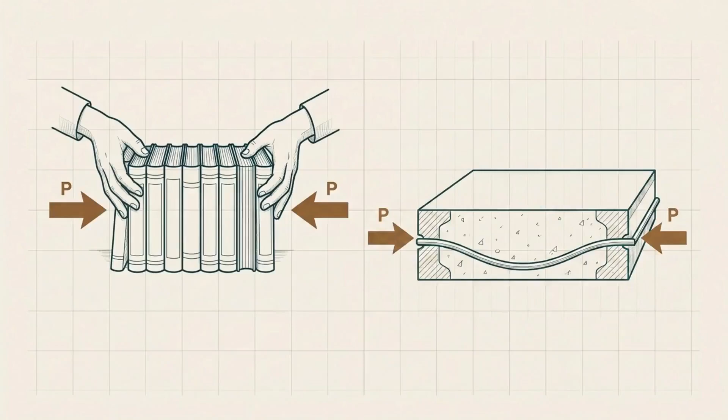Welcome back, everyone. In part 1, we saw how post-tensioning gives concrete muscles. Think of it like holding a stack of books horizontally. If you don't squeeze them hard enough from both ends, they'll fall. That squeeze is our active force, unlike regular reinforced concrete, which waits for a load to start working. Post-tension slabs are pre-compressed, ready to fight gravity from day one.

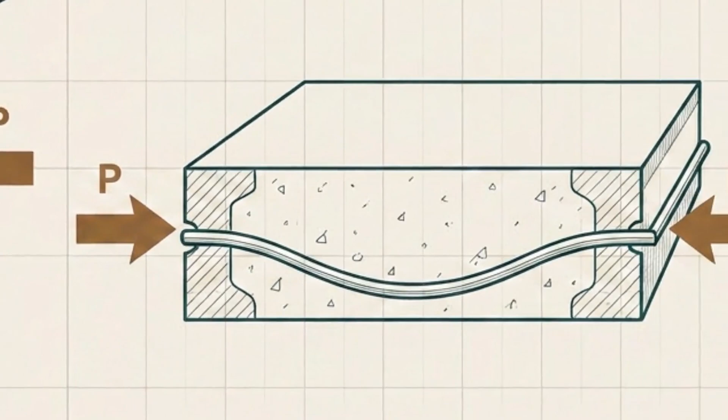Today, we'll look at the math that keeps these muscles strong and how the ACI 318 code ensures they don't overexert themselves. Let's talk about the magic formula.

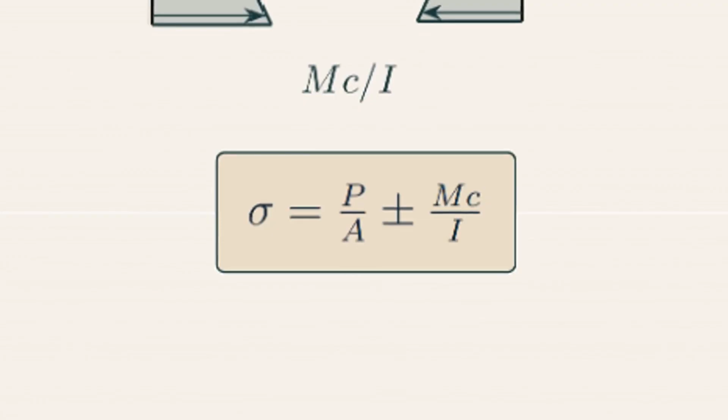To find the stress at any point, we use the combined stress equation: Stress equals P over A plus or minus M times C over I. The P over A part is the uniform squeeze we just talked about. The M times C over I comes from the bending moment.

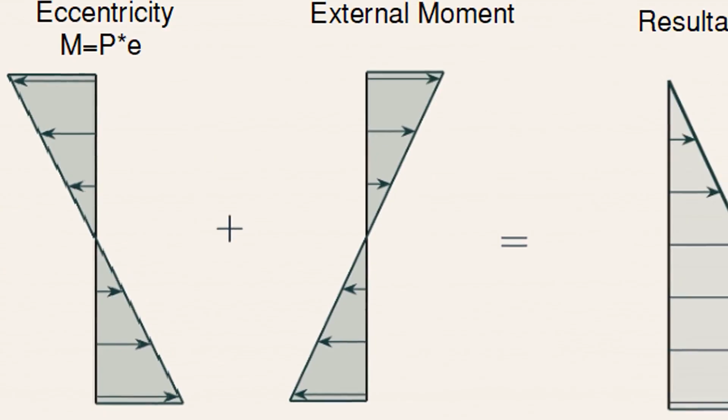But here's the trick. In PT slabs, we have an eccentric force because the tendon isn't in the middle. This creates an internal moment that actually counteracts the external loads. It's like leaning back while carrying a heavy box to stay balanced.

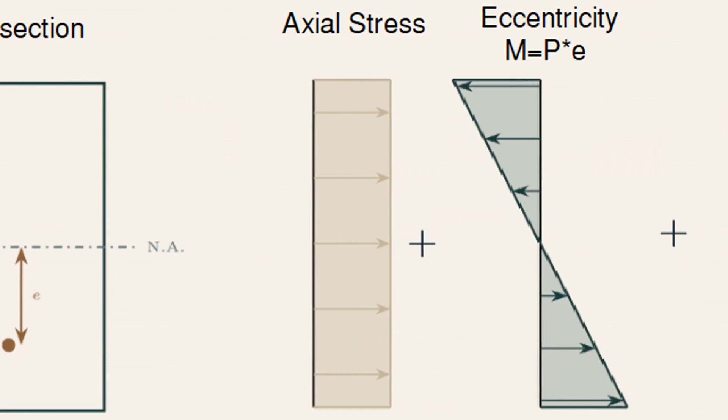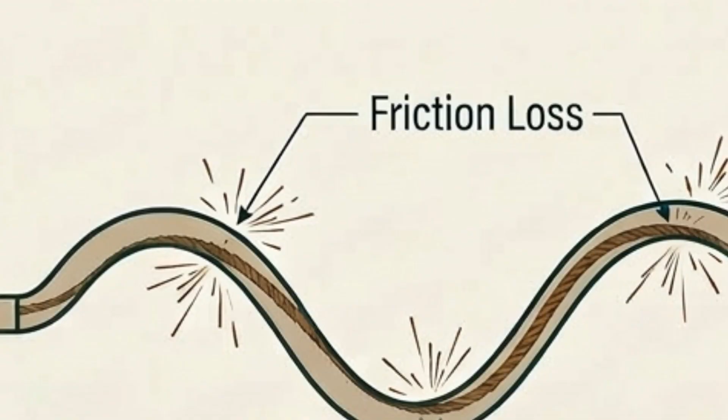Now we don't get all the force we pump in. Some is lost immediately. First, there's friction. Imagine pulling a rope through a curved garden hose. The more curves and the rougher the hose, the harder it is to pull. In PT, the steel rubs against the duct.

We also have elastic shortening. As we squeeze the concrete, it shrinks slightly like a spring, which causes the steel to slacken just a tiny bit. We must account for these thefts of force during the design stage.

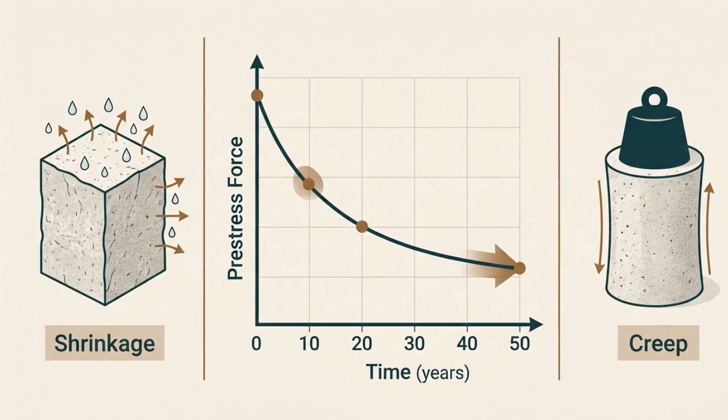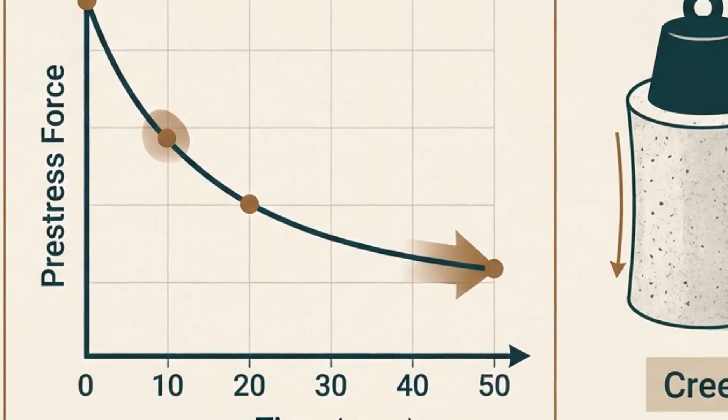Then there are the long-term slow losses. Concrete is alive in a way. It changes over time. Shrinkage happens as water evaporates and the slab physically gets smaller. Then there's creep. If you stand on a memory foam mattress, you sink slowly over time. Concrete does the same under constant pressure. Finally, steel relaxation happens when the high-strength wires get tired of being stretched and lose some tension.

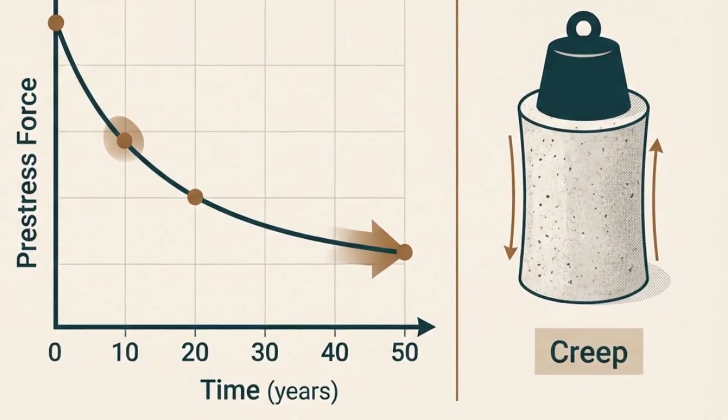Total losses can range from 15% to 25%, so we always over-tension at the start to compensate.

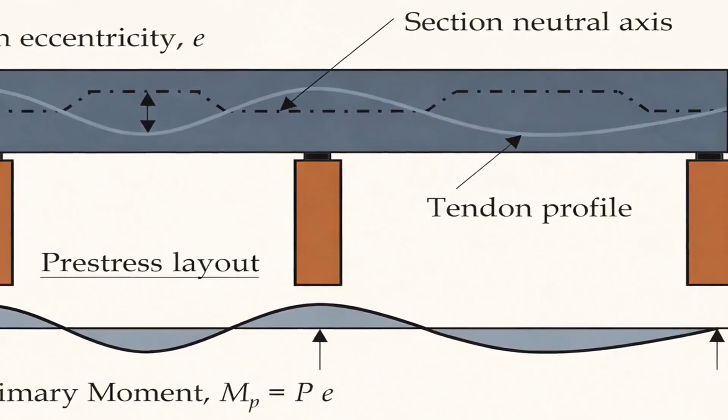In continuous slabs with multiple spans, things get spicy. When we tension a tendon, the slab wants to lift up, but the internal supports, the columns, say 'No, you stay here.' This restraint creates secondary moments.

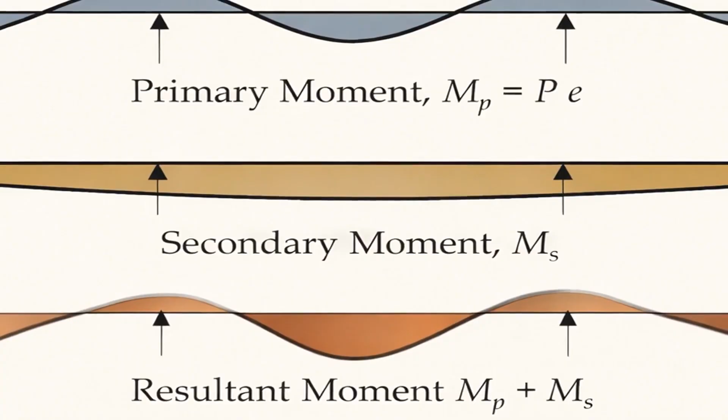Think of a group of people holding hands in a line. If one person jumps, the others feel a tug. These moments are hyperstatic, meaning they are caused by the structure's own constraints. We must add these to our primary moments to get the total design effect.

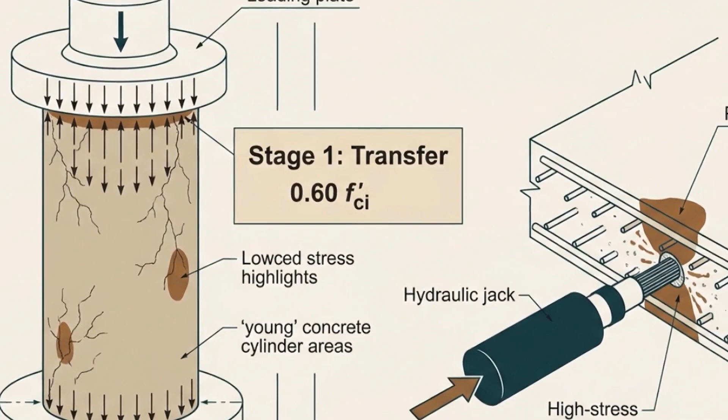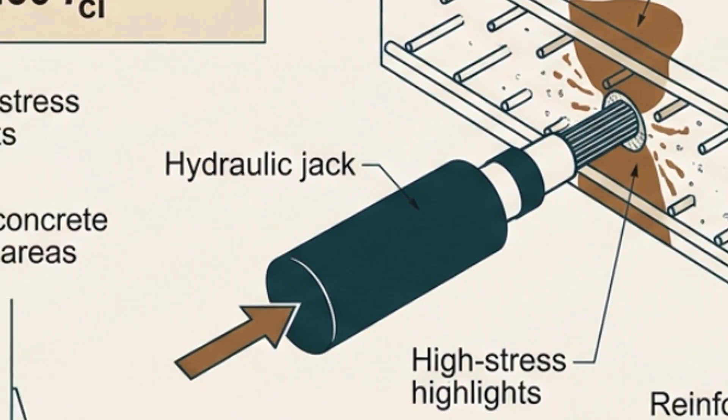The ACI 318 code is our rulebook. It checks the slab at two critical life stages. First is the transfer stage. This is right after we jack the tendons. The concrete is still young and hasn't reached full strength, but it's being hit with the maximum prestress force.

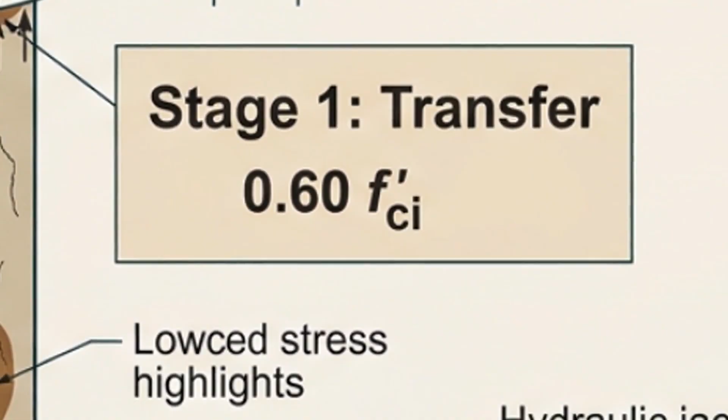The code limits the compression to 0.6 of the initial concrete strength, FCI, to prevent crushing, and limits tension to prevent cracking before the building is even finished.

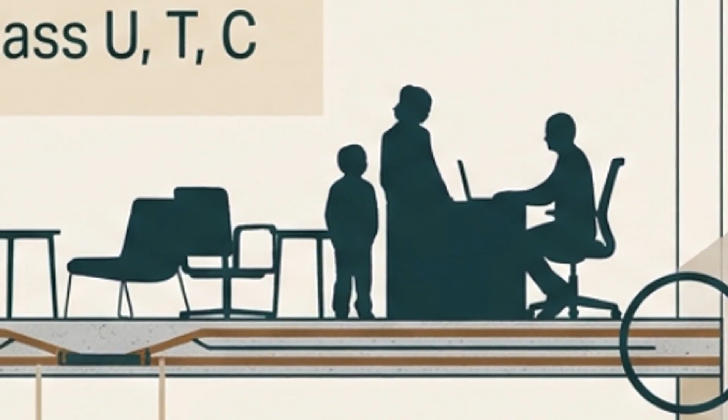Next is the service stage. Now the building is occupied, full of people and furniture. The concrete is at full strength, but the prestress force has dropped due to those losses we discussed.

ACI 318 categorizes slabs here: Class U, uncracked; Class T, transition; and Class C, cracked. Most PT slabs are designed as Class U, meaning we keep the tension so low that the concrete theoretically never cracks under normal loads. This is why PT floors look so smooth and perfect.

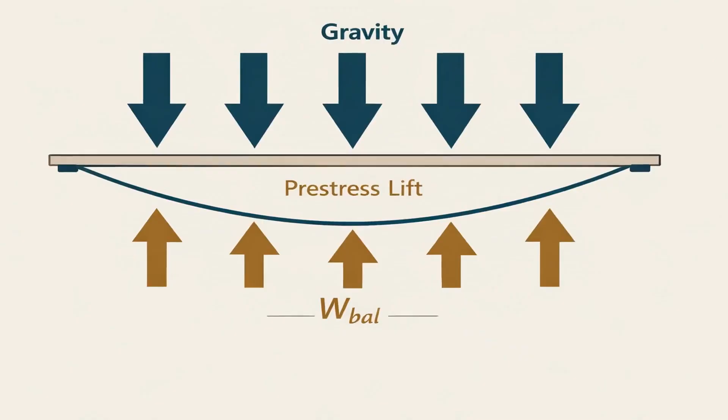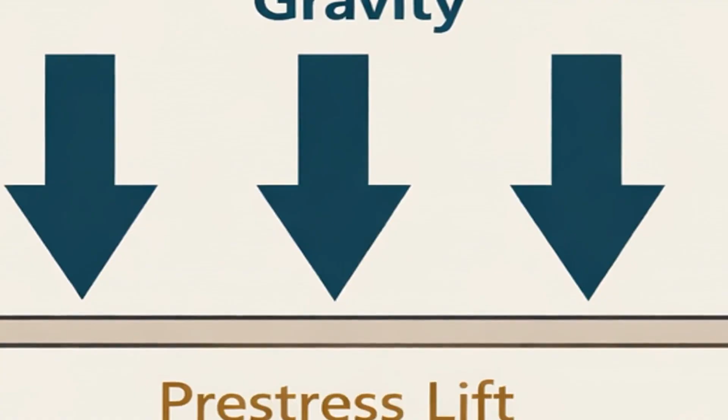One of the coolest ways to design PT is load balancing. Since the tendon is a parabola, it exerts a constant upward pressure. We can choose a tendon force that exactly cancels out a percentage of the dead load. It's like the slab is floating. If we balance 80% of the weight, the slab only feels 20% of its own gravity.

This allows for incredibly long spans and very thin slabs that would be impossible with traditional rebar alone.

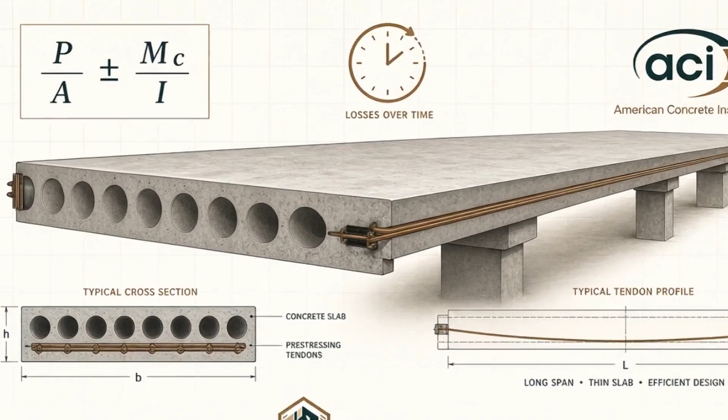So, to recap, we use the combined stress formula, account for immediate and long-term losses, and handle secondary moments in continuous spans. We always stay within ACI 318 limits to ensure safety at both transfer and service stages. Post-tensioning isn't just about strength. It's about control, controlling cracks, controlling deflections, and pushing the boundaries of what concrete can do.